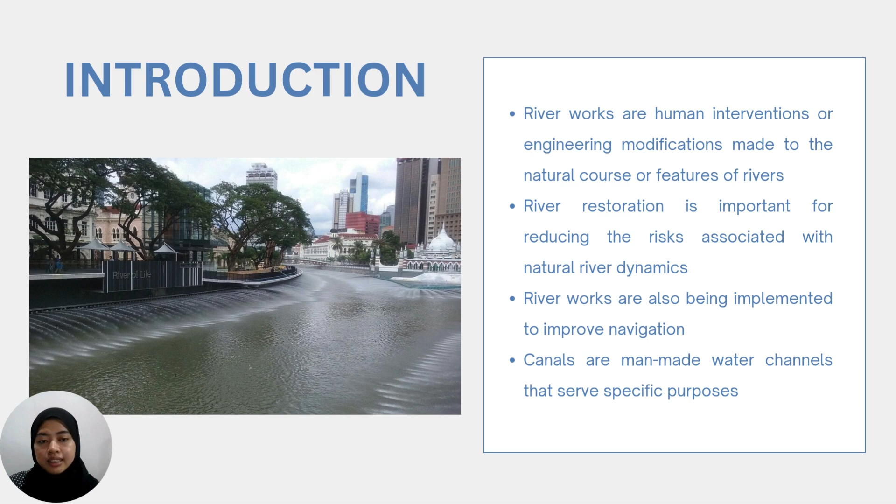Riverworks are human interventions or engineering modifications made to the natural course or features of rivers. River restoration is important for reducing the risks associated with natural river dynamics like erosion, sedimentation, and seasonal flooding. Riverworks are also implemented to improve navigation, while canals are man-made water channels that serve specific purposes.

Next I will explain the types of riverwork and canals. A river is a natural flowing watercourse, usually fresh water flowing toward an ocean, sea, lake or another river. Rivers are sources of water needed for irrigation, water supply to towns, industry, recreation, and hydropower.

So rivers are divided into three types: river in hills, known as upper reaches; river in alluvial plains, known as lower reaches; and tidal rivers.

River diversion is the planned rerouting of water flow from its natural course or channel to an alternate path or channel. This is typically accomplished by constructing structures or excavating channels to redirect the river's flow.

Riverbank protection means preventing erosion and keeping a river or stream bank stable. This involves building structures or using methods to stop water from slowly wearing away the banks.

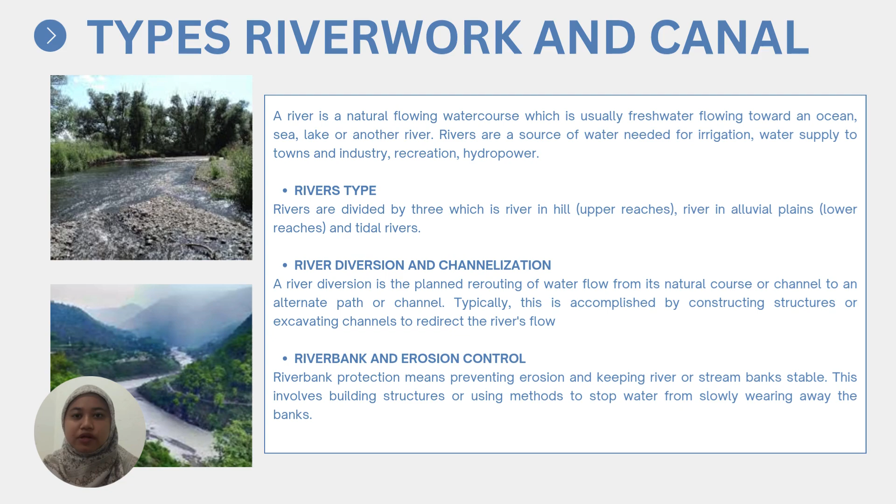Next is the designs of riverworks and canals. The design of riverwork and canal is an important part of water engineering. It helps to control water flow, prevent flood, and improve navigation.

Environmental considerations are also essential to ensure minimal disruption to aquatic ecosystems and riverine habitats. In urban settings, canal designs often incorporate aesthetic features and recreational zones alongside flood control mechanisms.

Beside the main structure, riverwork and canal design must also plan for long-term strength and flexibility. The designs need to consider future climate changes like heavy rains and higher water levels, which could affect the system's durability. Also, planting grass and shrubs on slopes helps prevent erosion and improve the environment.

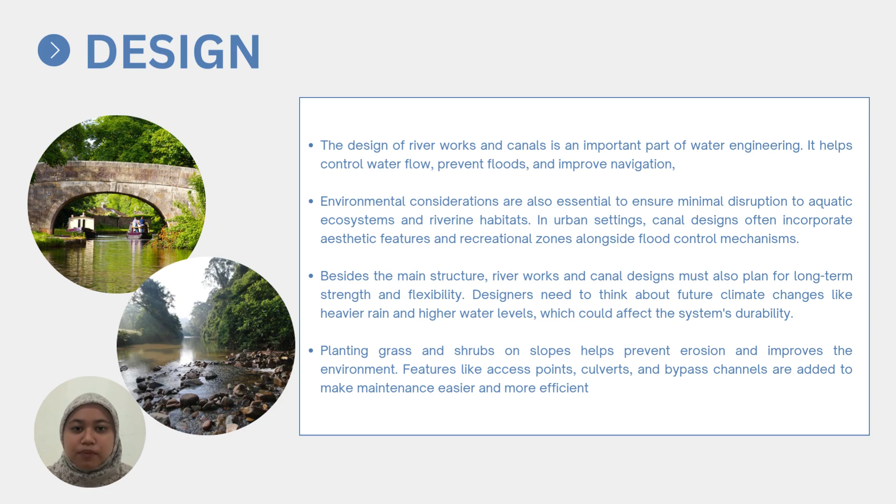Features like access points, culverts, and bypass channels are added to make maintenance easier and more efficient.

Next is the construction process. The process begins by identifying the purpose and functions of the river and canal structure, along with the environmental conditions it will face such as water flow, sediments, and debris.

Next, engineers determine the design flow, keeping in mind that natural water levels may exceed predicted values and assess potential risks and structural damage during extreme conditions.

Then the site is prepared by draining and clearing vegetation along the proposed channel alignment. Fourth, excavation is carried out using manual tools and machinery like shovels, carts, cranes, dredges, and scrapers to shape the canal routes.

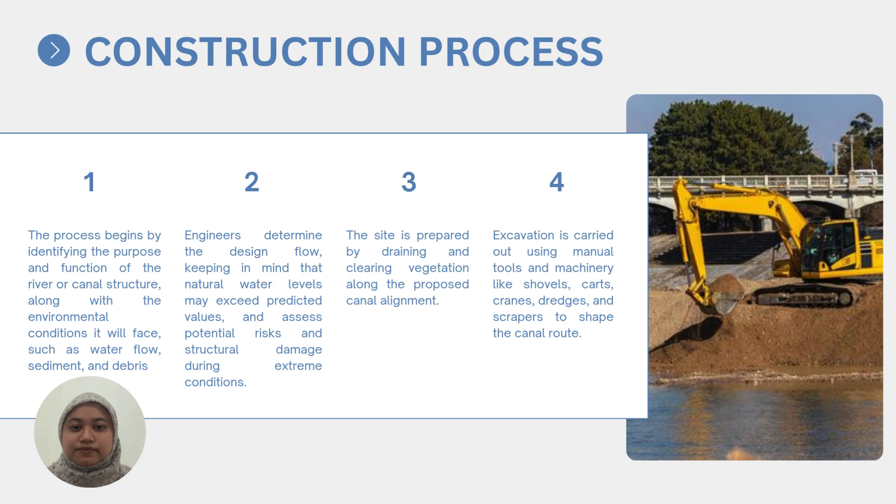The next step involves forming embankments and adjusting canal elevation through a series of level channels and constructing lift locks for boat passage between different heights. Locks are built using materials such as stone, timber, or cement, depending on local availability, to manage water flow and navigation.

Engineers ensure there is an adequate and continuous water supply by identifying nearby sources, building reservoirs, dams, and digging feeders to maintain water level.

Finally, structures like culverts and aqueducts are constructed to allow the canals to cross over rivers and streams, with designs made to withstand flooding and protect the canal's integrity.

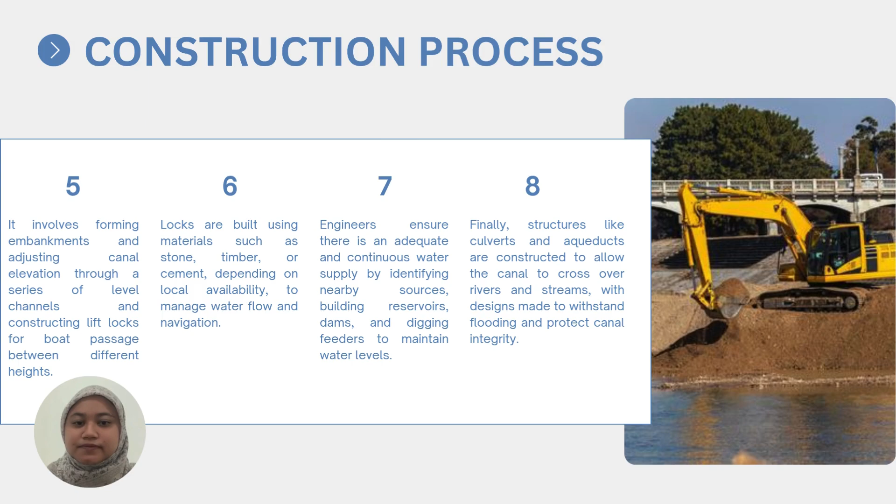Next is materials. The first one is puddle clay, used to line canals and riverbeds because it efficiently reduces seepage. Secondly, we have concrete, which is a popular lining material as technology advances because it strengthens durability and hydraulic advantages.

It is also generally produced using slip form processes, provides good impermeability and endurance, with thickness ranging from 5 to 15 cm depending on the structural needs.

Thirdly is compacted clay or bentonite layers. It is used to stiffen the concrete that provides cost-effective permeability control, and it can also reduce seepage and stabilize groundwater.

Lastly is rock and gravel, which is used in embankments and revetments, and also to prevent erosion.

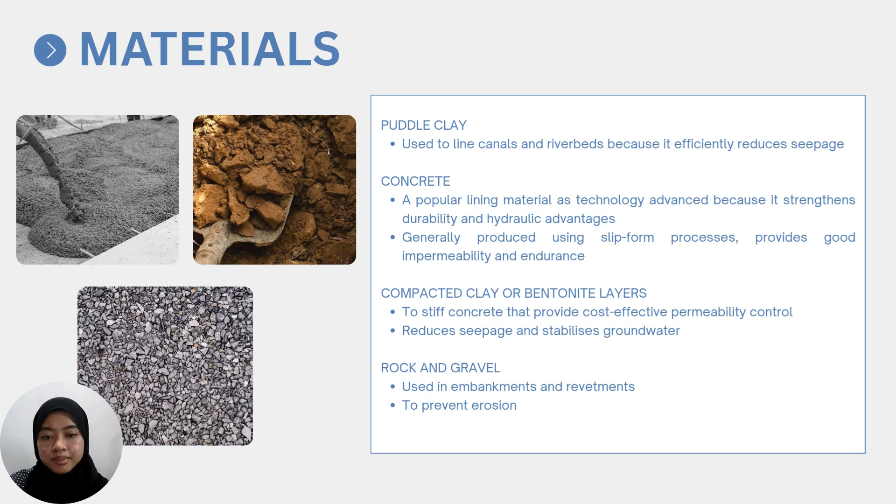For falsework, it is a temporary support structure used during the construction of hydraulic infrastructure, such as bridges, culverts, and spillways in canal and river projects.

The traditional timber falsework is still used for smaller scale or distant operations because it is cheaper and easier to handle. Next, steel systems have higher strength and reusability, making them excellent for larger loads in bridge piers, aqueduct superstructures, and large canal crossings.

The falsework must withstand not only static loads, such as wet concrete weight and formwork, but also dynamic forces. Lastly, modular or changeable falsework systems improve efficiency in areas with changing water levels, such as tidal or monsoon affected zones.

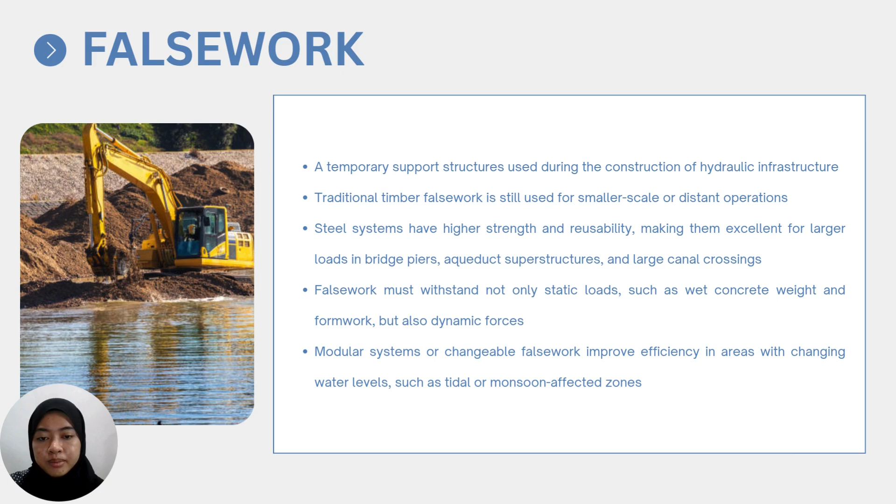Next is the case study. Environmental Impact Assessment (EIA) in Sarawak is mandated by the Natural Resources and Environment Board for major projects such as hydropower dams, flood mitigation, and agriculture expansion.

Its purpose is to evaluate potential impact on water quality, river hydrology, biodiversity, soil stability, and the livelihood of local communities. For example, the Lower Saribas project identified risks like soil erosion and recommended mitigation measures such as buffer zones and drainage control. However, the EIA process faces limitations.

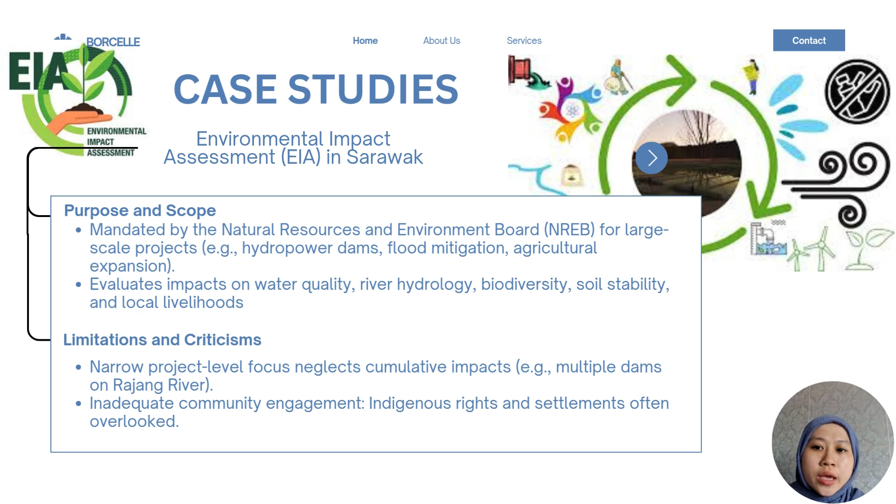It often focuses narrowly on individual projects, overlooking cumulative impacts like those from multiple dams on the Rajang River. Additionally, community engagement has been inadequate, with indigenous rights and settlement sometimes being ignored.

Sarawak River Basin Project Background. The Sarawak River Basin, located in Sarawak on Borneo Island, covers an area of about 2,459 square kilometers. Rapid urbanization has led to challenges such as water scarcity, pollution, and frequent flooding in the region.

To address this issue, the government launched the Integrated River Basin Development Project, known as PLSB, with an investment of RM 191 million. This project aimed to improve flood mitigation, water management, and environment conservation, targeting completion by this year, 2025. The PLSB is part of a larger effort under the 11th Malaysia Plan, which includes 22 flood mitigation projects

across Sarawak with a total budget of RM 561 million, reflecting strong federal commitment to tackle flood disasters and protect communities. The Department of Irrigation and Drainage, or DID Sarawak, leads the Sarawak River Basin project. They work closely with several collaborators, including the federal government, which provides funding and policy support.

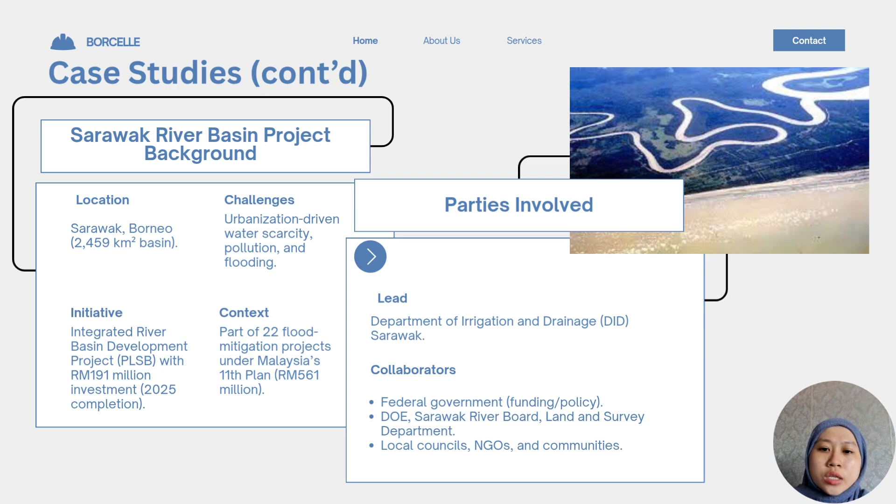Next is construction technique. The project uses rock-filled weirs, RCC gravity dam, and the tidal barrage with ship lock for water storage, flood control, and stopping saltwater intrusion. Urban drains and detention ponds help manage flooding in Kuching.

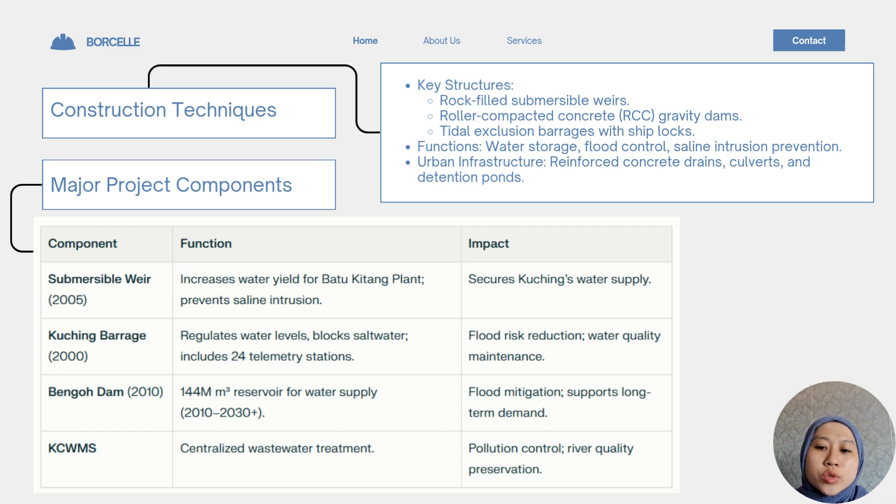And for major project components, the key structures include the 2005 submersible weir securing Kuching water supply. Next is the 2000 Kuching Barrage controlling water level and flood risks, and the 2010 Bengoh Dam providing long-term water supply storage and flood mitigation. And lastly, the Kuching wastewater system treating pollution to protect river quality.

Starting with Bengoh Dam, step 1, river diversion using a twin box culvert, 4 meter times 4.5 meter, to redirect flow during construction. A third culvert was added later to protect upstream villages. Step 2, main dam built with roller compacted concrete, RCC, with 160,000 cubic meters placed with precise slopes, 0.78 to 1 upstream, 0.9 to 1 downstream for stability.

And step 3, stepped spillway added to handle extreme floods with 2,420 cubic meters per second flow and reduce erosion. For the Kuching Barrage, the 5 radial steel gates, each 2.5 meter wide and 168 tons, were installed to block the tidal surge. Gates open twice daily in the dry season to flush saline water downstream, protecting freshwater quality.

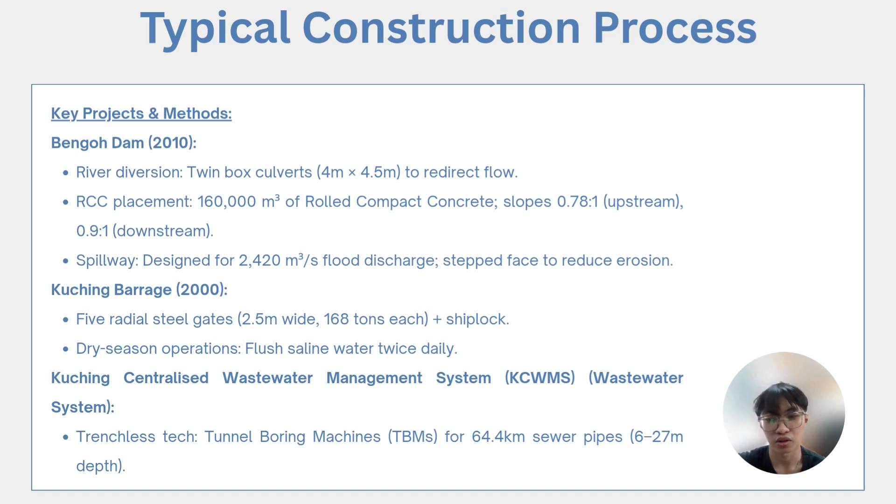Finally, the Kuching centralized wastewater management system uses a trenchless technology, which is the tunnel boring machines, TBMs, and laid 64.4 kilometers of pipe, 6 to 27 meters underground, minimizing the urban disruption. Materials were chosen for durability and environmental resistance.

For Bengoh Dam, the RCC for seismic strength plus stainless steel valves to resist humidity and corrosion. Meanwhile, for Kuching Barrage, the precast concrete and steel gates to withstand the tidal forces and salt water. For Batu Kitang Weir, the armour rock from 0.6 to 1.4 meter diameter to stabilize the riverbed against erosion. And for the KCWMS pipes, HDPE plastic for flexibility and leak-proof seals plus reinforced concrete for treatment plants.

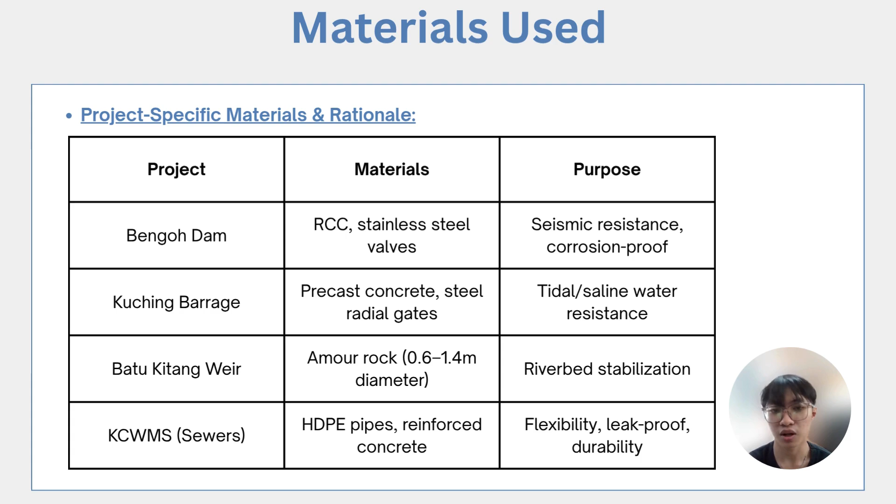Several critical issues arose during operation. The first issue is saline intrusion. The risk is saltwater contaminating the Kuching freshwater supply. The solution is the barrage regulating tides, maintaining a permanent freshwater reserve upstream. The second issue is sedimentation. The risk here is silt clogging channels, reducing the water flow. The solution is weekly flushing of barrage gates, added on with periodic dredging.

The third issue is low dissolved oxygen, or DO. The risk is polluted wastewater killing aquatic life, and the DO dropped to 0.5 mg per L. So the solution here is the KCWMS treating wastewater to Standard A quality, raising the DO to 4.0 mg per L. And the last issue is urban flooding. The risk here is heavy rains overwhelming the Kuching drainage. So the solution is the Bengoh Dam spillway diverting the floodwaters plus the barrage gates controlling the water level.

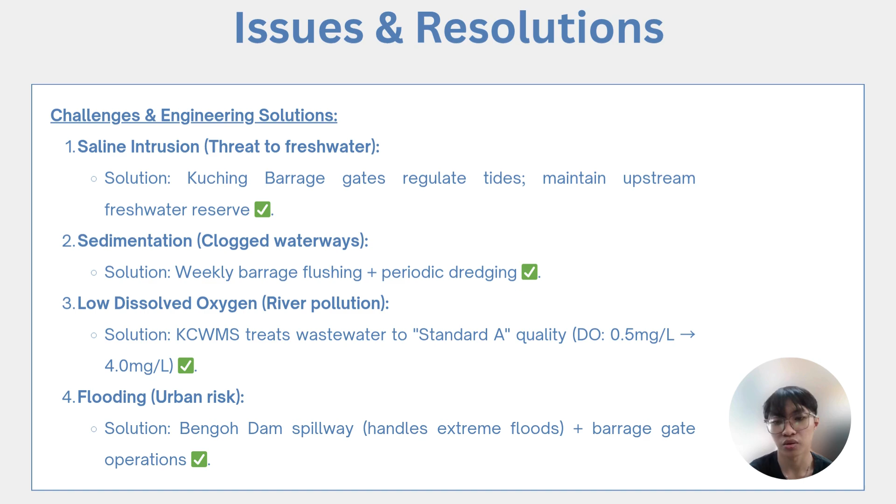For conclusion, water resource management, urban flood control, irrigation, navigation, and also environmental sustainability all rely heavily on river and canal works. The Klang River is a local example of how rivers and canal systems may affect their urban environments. River works and canals are more than just practical hydraulic constructions; they are critical to the sustainability, safety, and livability of urban and rural communities.

Lastly, the Klang River experience demonstrates the significance of integrating engineering knowledge, environmental awareness, and also public participation.